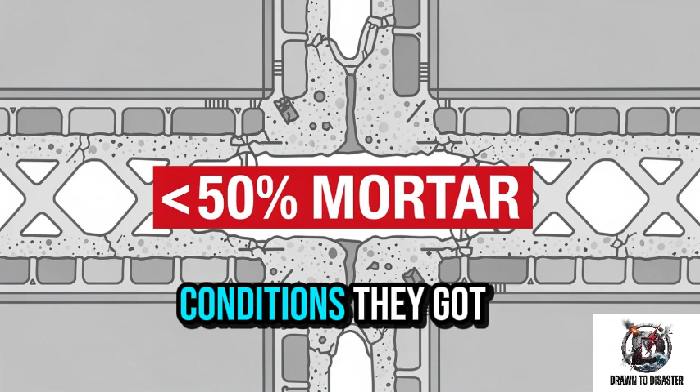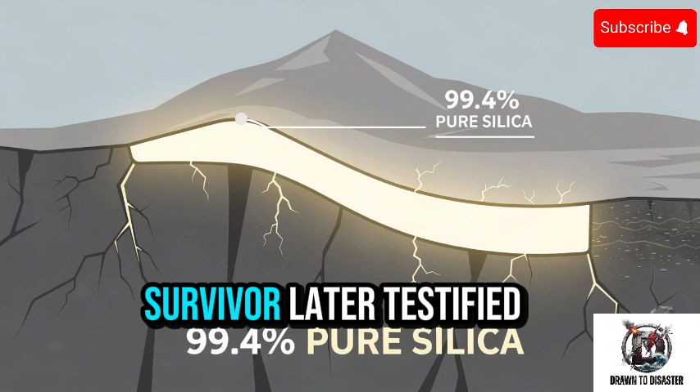The mountain they were drilling through was 99.4% pure silica sandstone, one of the most hazardous geological formations a tunneler could encounter. The contractors knew this. When workers drill dry through silica rock, the dust fills the air in clouds so thick that, as one survivor later testified, you could practically chew it. Inhaling it causes silicosis, a fatal lung disease that scars the lungs from the inside until a person suffocates over months or years. Silicosis had been documented by medical science since the 1700s.

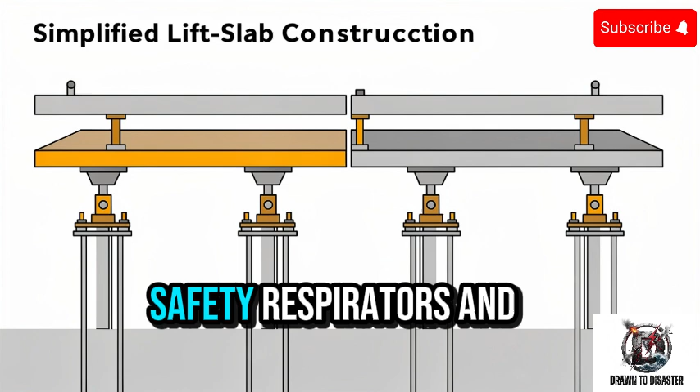Every properly trained engineer on the site knew what it did. The contractors drilled dry anyway. It was faster. Safety respirators and proper ventilation would have slowed the job and cut into the bonus for early completion. Masks were provided on site, but only for inspectors and company managers. The workers got nothing. Men began dying within 2 months of entering the tunnel, their lungs filled with scar tissue. They collapsed at the face of the rock and were carried out.

Those who became too sick to work were driven off the property by a local sheriff acting as an enforcer for the company. Some were put on trains and sent back south to die in homes they hadn't seen in a year. Others were buried on site, in unmarked graves on private farmland, black men and white men in separate plots, with different death payments offered to their families. Unmarried black workers, $400. Married white workers, $1,000.

At least 764 men died. Some estimates run as high as 2,000. The exact number will never be known because Union Carbide quietly disposed of the burial records. No one from the company or the contracting firm was ever charged with a crime. A congressional hearing called the project a grave and inhuman disregard for all consideration for the health, lives, and future of the employees. Then Congress passed a law requiring respirators in dusty work sites and moved on. The tunnel still carries water today.

Ronan Point, the building that wasn't a building. On the morning of May 16, 1968, a woman named Ivy Hodge went into her kitchen on the 18th floor of the Ronan Point Tower in East London and struck a match to light her stove. The gas explosion that followed wasn't large. Investigators later confirmed it was less powerful than what would damage a person's hearing. It knocked Hodge unconscious and blew out the walls of her apartment. That should have been the end of it.

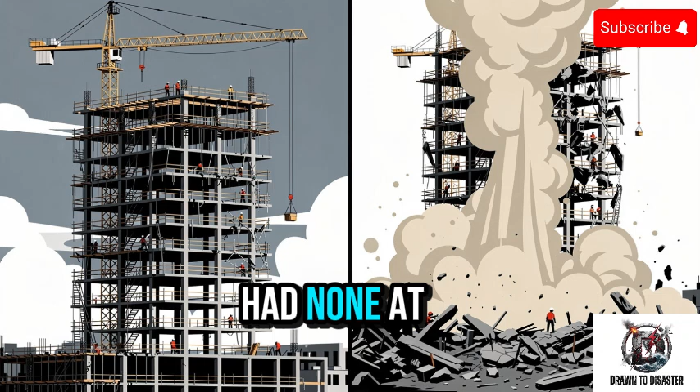When later investigators opened the building's joints, they found that many critical connections contained less than 50% of the required mortar. Some had none at all. The building had survived intact only because nothing had yet tested whether it was actually holding together. When one corner's load-bearing wall was removed by the explosion, there was nothing else supporting the floors above.

They collapsed sequentially, each falling onto the one below, in what engineers call a progressive collapse. And then the falling weight crushed the floors below too. 4 people died immediately. A 5th died in hospital weeks later.

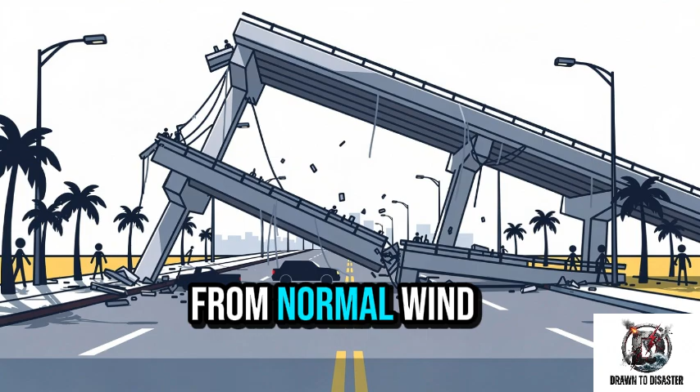The publicly commissioned inquiry found that the building's design was inadequate and that the construction quality was deficient throughout. It was rebuilt and kept occupied. When it was finally demolished in 1986, engineers found the joints inside were still incorrect. The building had been on the edge of collapse from normal wind load alone for 18 years.

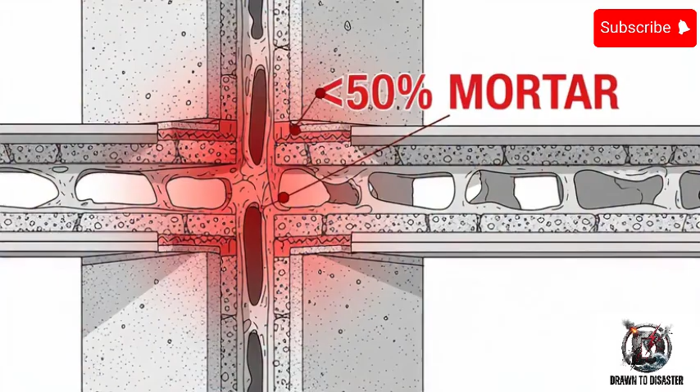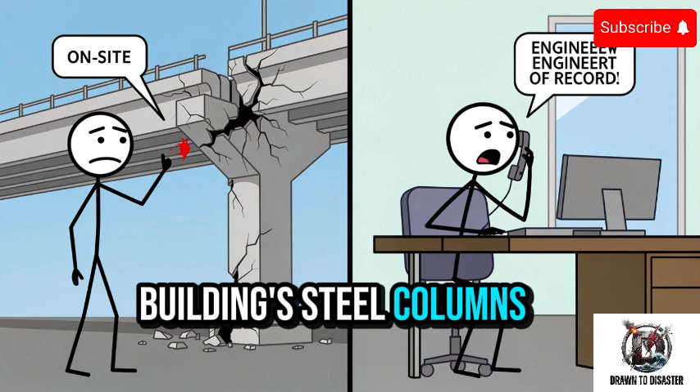L'Ambiance Plaza, 5 seconds. At 1:36 p.m. on April 23, 1987, construction workers at the L'Ambiance Plaza site in Bridgeport, Connecticut, were pouring concrete for the floors of a 16-story apartment building. The technique being used was called lift slab construction. Concrete floor slabs were poured at ground level and then hydraulically jacked up the building's steel columns to their final positions, where they'd be welded into place.

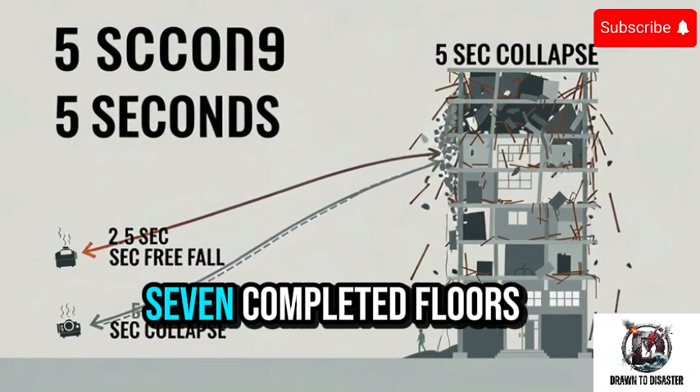At 1:36 and a few seconds later, everything above the third floor was gone. The entire structure, 7 completed floors of a building, collapsed in 5 seconds, which is 2.5 seconds longer than a free-falling object would take to reach the same height from the ground. It fell so fast that many workers had no time to move. 28 men were killed, 22 were injured. Recovery teams worked for 2 days pulling workers from rubble that had compacted to a fraction of its original height.

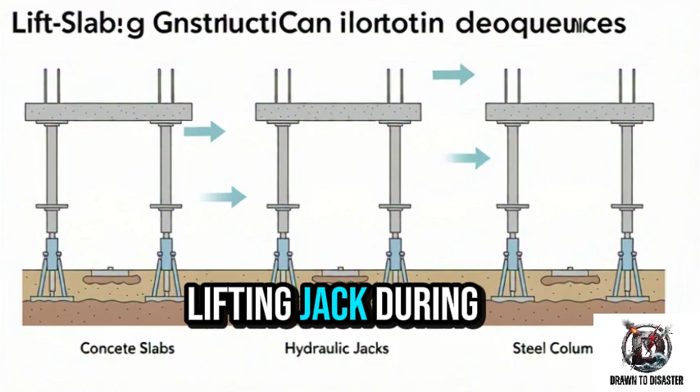Federal investigators determined the most probable cause was a loss of support at a single lifting jack during the placement of a 3-slab package. The lift slab method required that the hydraulic jacks lifting each floor be capable of handling 2.5 times the anticipated load. Evidence suggested the system hadn't been built to that standard. It was the largest loss of life in a single U.S. construction accident since 51 workers were killed in 1978.

OSHA had cited the lift slab technique in previous inspections. After L'Ambiance, the agency imposed a nationwide moratorium on lift slab construction while it conducted a complete safety review. The review took 2 years.

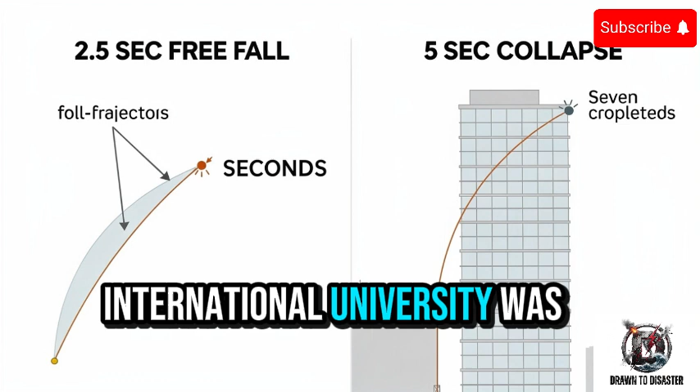The FIU Bridge, the crack nobody stopped for. On the morning of March 15, 2018, a brand new 950-ton pedestrian bridge at Florida International University was being prepared for final installation over Southwest 8th Street in Miami. The bridge had been designed and built as a showcase of accelerated construction technology. Its entire main span assembled off to the side of the road, then swung into position over a weekend, so traffic wasn't disrupted for months. It was meant to be a demonstration of modern engineering, done right.

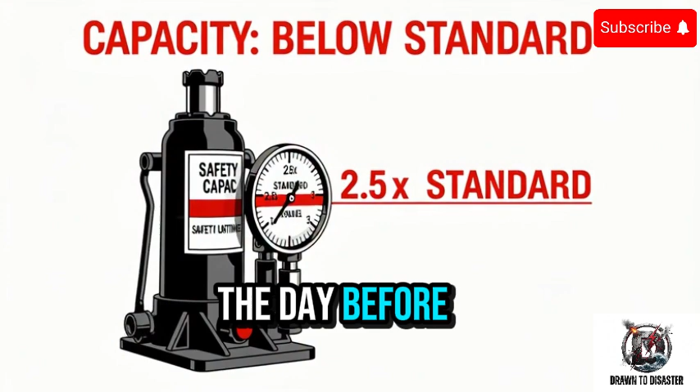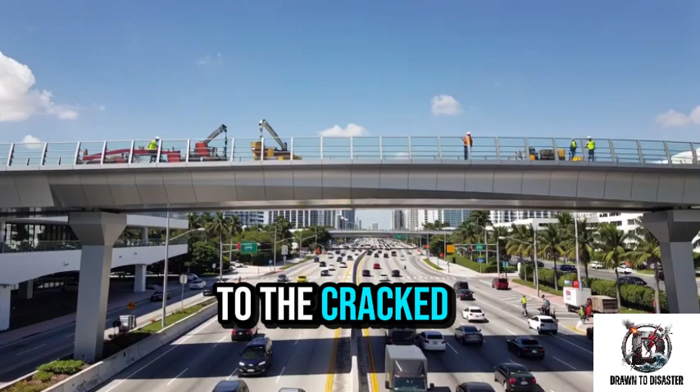The day before, a construction engineer had called the project's engineer of record to report a crack in one of the bridge's structural members. Notes from the call indicate the engineer told him it wasn't a safety concern and that they would address it at a meeting scheduled for later that week. The next morning, workers were on top of the bridge, tightening a post-tensioning rod connected to the cracked member. Traffic was moving normally below.

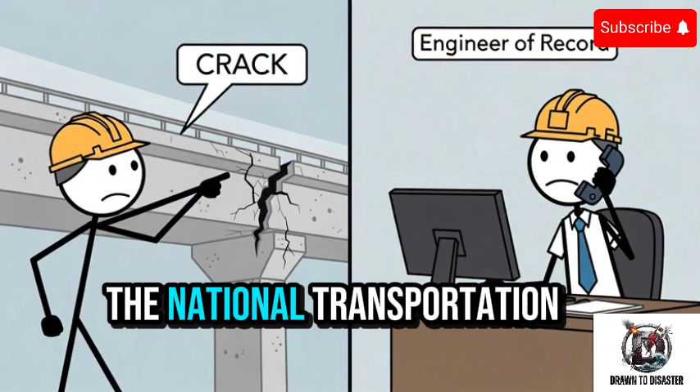At 1:47 p.m., the entire span collapsed onto Southwest 8th Street, crushing 4 cars. 5 people in those cars were killed. 1 construction worker on top of the bridge also died. 8 others were injured. The National Transportation Safety Board investigation found that a critical structural node in the bridge had been under-designed, that the crack was a direct warning sign of imminent failure, and that the decision to continue work without closing the road or halting the project was the central factor in the deaths.

The design firm settled with families for undisclosed amounts. Florida also revoked the engineering licenses of several individuals involved. The road was reopened within weeks. The bridge was removed in pieces.

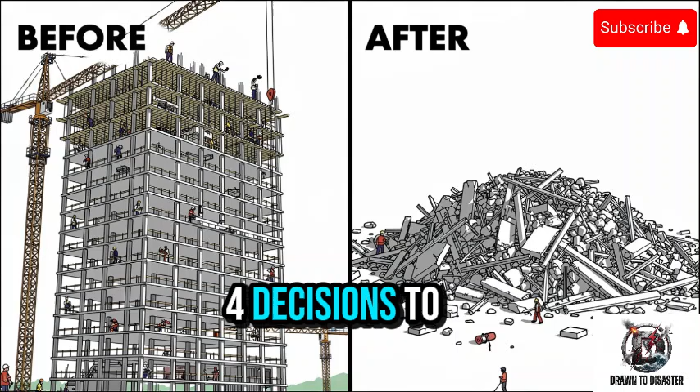4 projects. 4 decisions to skip or ignore a step that existed specifically to prevent people from dying. In every case, someone in a position of authority, a contractor, a designer, an engineer on a phone call, had the information they needed. They just didn't stop.